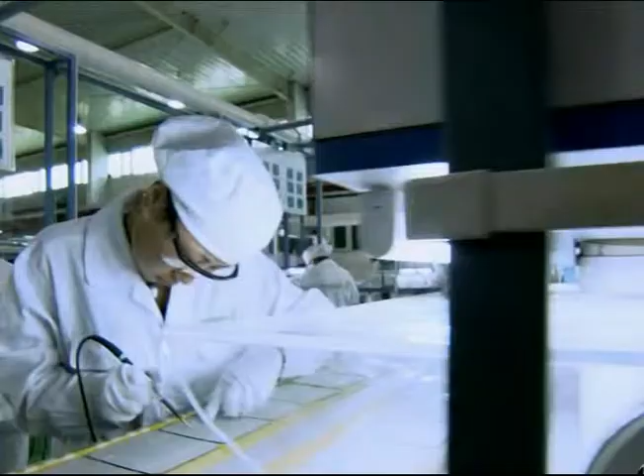Founded in Xi'an in 2002, with the company motto of Serving Customers, Emphasizing Quality, Nurturing Win-Win, Striving for Excellence, Enabling Innovation, Xi'an Tiangong Electric Limited Company has grown rapidly and steadily.

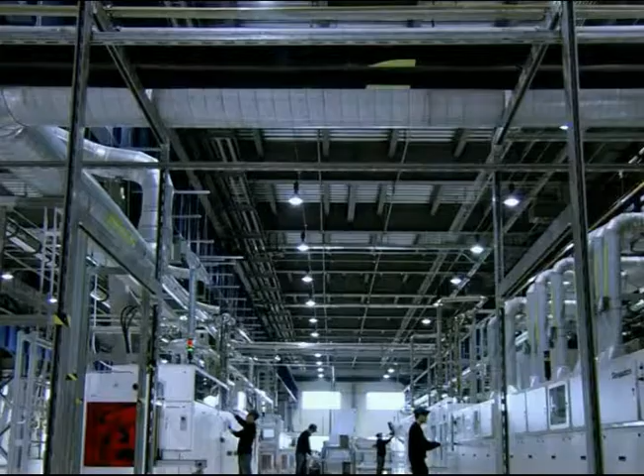TGE is now one of the premier varistor suppliers in China, with the most advanced technology, the highest product performance parameters, and the largest selection of product categories.

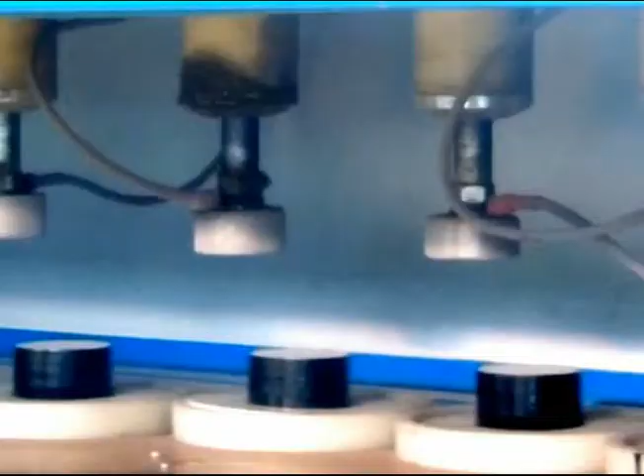TGE strives to support worldwide Western manufacturers with high performance and high quality products. Through tremendous growth in the last 10 years, TGE now possesses the manufacturing technology of various high-performance DC and AC varistors and high-gradient varistors.

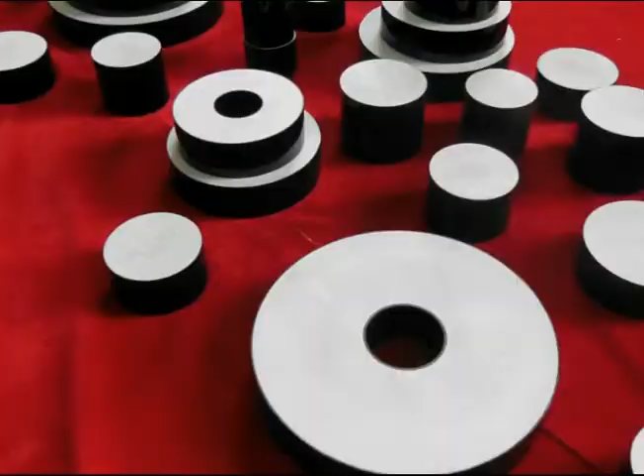TGE has built an advanced, complete varistor production line, complemented with a full range of diagnostic equipment and instruments. TGE has established an ISO 9001 compliant quality management system. TGE's management brings years of diverse experience in management and a history of success.

Combining business acumen with technical savvy, its executives lead a team of talented employees to provide strong varistor research and development and manufacturing capabilities. We truly appreciate the opportunity to earn your business and are looking forward to serving you.

Ladies and gentlemen, please allow me to give you a brief introduction of the process of production of the TGE varistor.

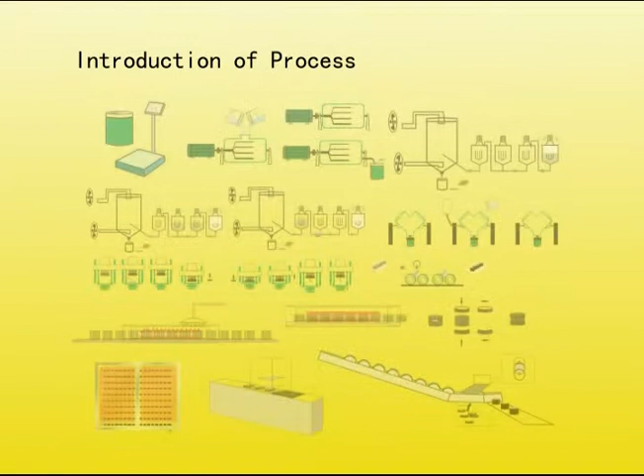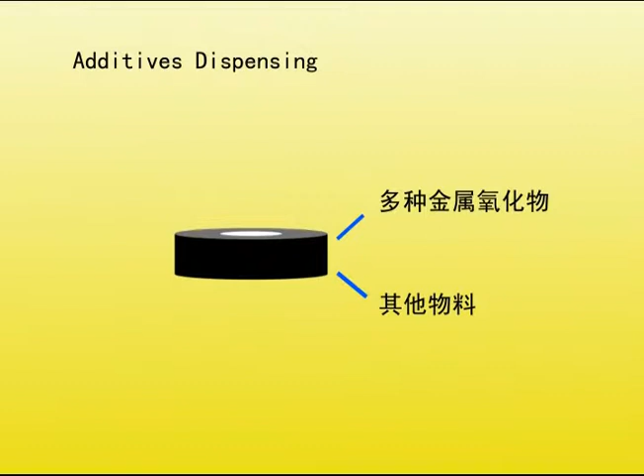The first step, additive dispensing. Material dispensing is a core part of varistor production. Material dispensing of zinc oxide, additives, and accessories is required in several processing steps. The most important one is additive dispensing.

Metal oxide materials are respectively measured per predefined weight on a high-precision electronic scale and placed in separate stainless steel containers for use in the next process.

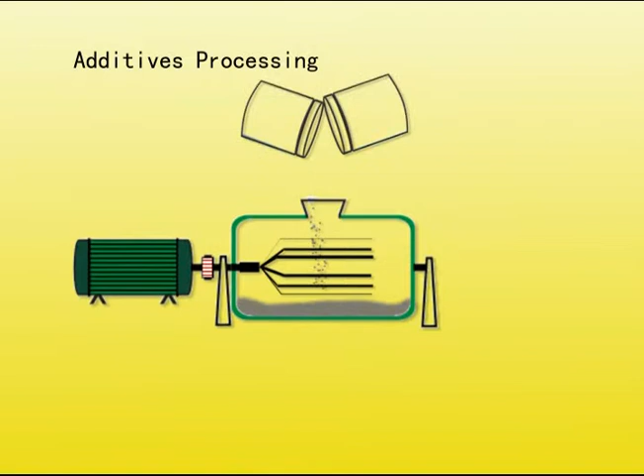The second step, additives processing. The additives dispensed per predefined ratio are put into the sand mill together with a certain amount of pure water for grinding. When the average diameter and the diameter distribution reach the requirement, the material is removed from the sand mill for use in the next process.

The third step, mixing and granulating. Zinc oxide powder, qualified processed additives and accessories, and pure water are measured per predefined ratio and put into a high-speed mixing tank for mixing and blending.

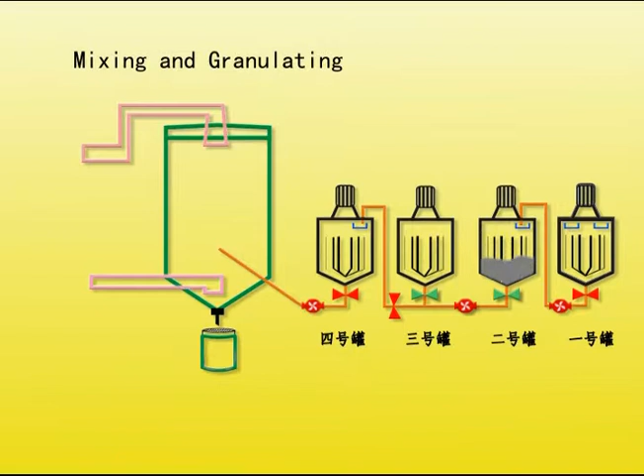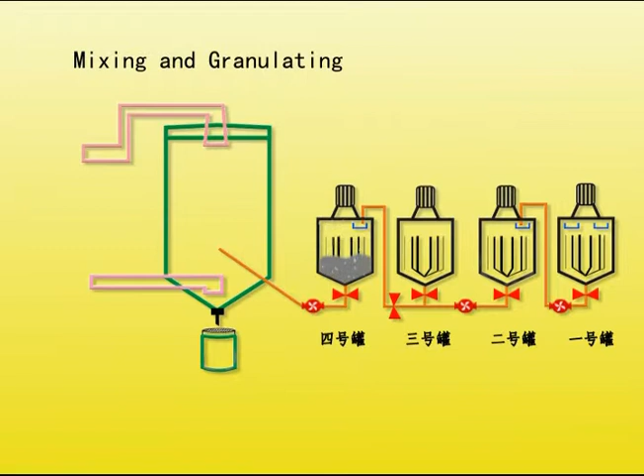Once the slurry reaches the required processing requirement, it will be put into a storage tank, and then a high-pressure spray gun is used to pour the material into the high-temperature spray drying tower to produce specified powder.

The fourth step, hydration of the granulated powder. A certain amount of granulated powder is poured into a hydrous machine. At the same time, pure water is slowly added in. The material is allowed to mix thoroughly to generate granulated powder with a stable and uniform hydrous rate.

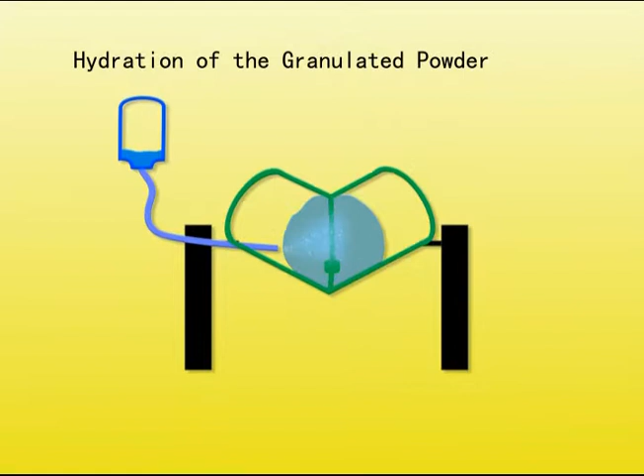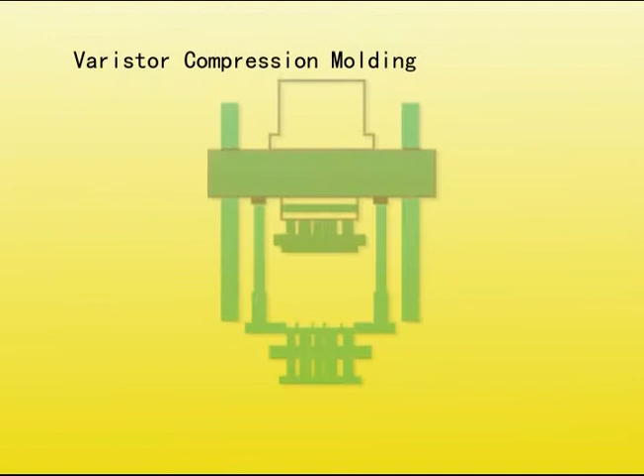The fifth step, varistor compression molding. An automatic varistor molding machine and different mold sizes are used to compress hydrous powder to produce a varistor body with specified size and density. The sixth step, varistor binder removal and pre-sintering.

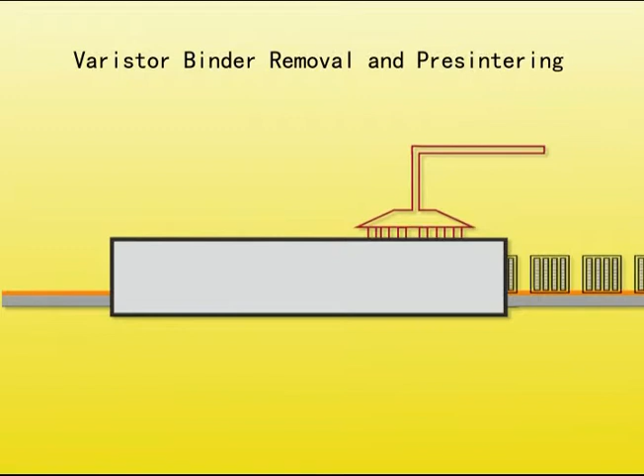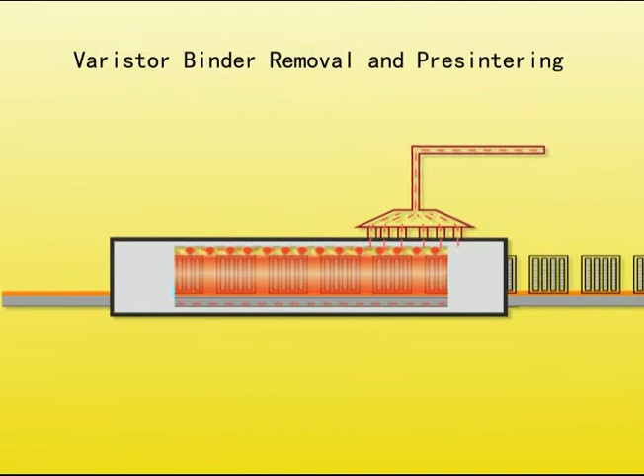The molded varistor is put into a sagger. The sagger is placed onto the rail of the automatic furnace and processed at a predefined speed to remove binder and water from the varistor until the shrinkage rate reaches the processing requirement.

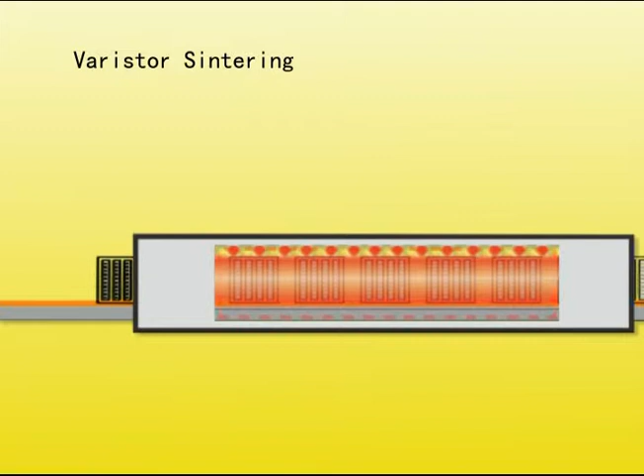The seventh step, varistor sintering. After the binder removal and pre-sintering process is completed, the varistor is put into a sagger. The sagger is placed onto the rail of the automatic furnace and processed strictly according to the predefined temperature and velocity to complete the sintering of the varistor.

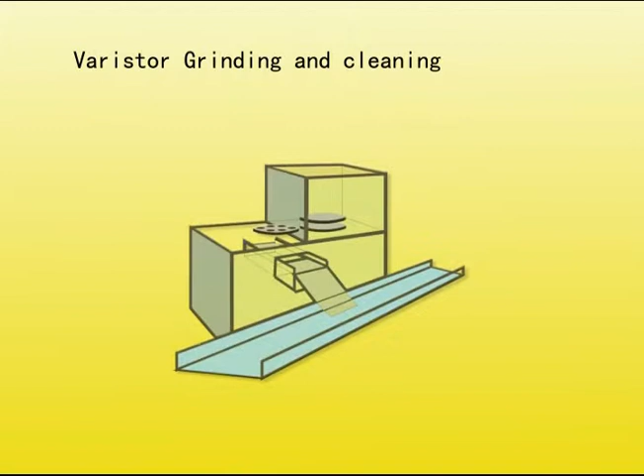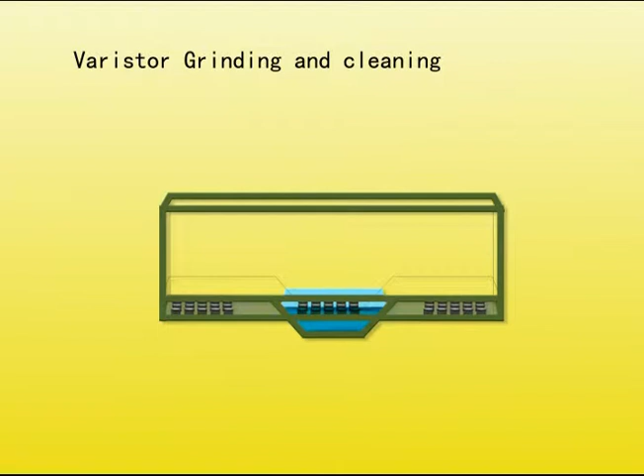The eighth step, varistor grinding and cleaning. The two surfaces of the sintered varistor are grinded using the grinding machine according to the predefined form and position tolerance specification. The grinded varistor is then placed into a tunnel ultrasonic cleaner for cleaning and drying.

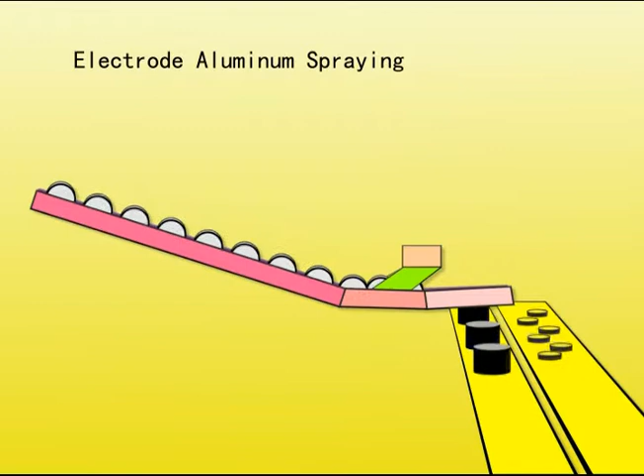The ninth step, electrode aluminum spraying. The varistor and the rubber wrap for aluminum spraying are put into an automatic carrying machine to place the rubber wrap at the two ends of the varistor. The varistor is then put into an automatic sprayer to apply aluminum coating on the electrodes at the two ends of the varistor respectively. The rubber wraps are then removed using the uncovering machine, and the varistor is then cleaned.

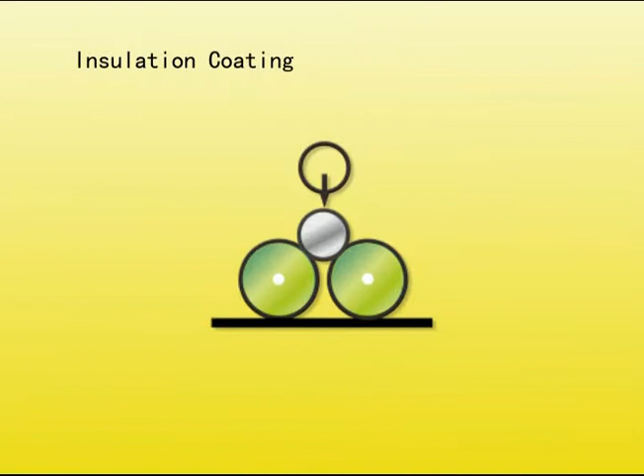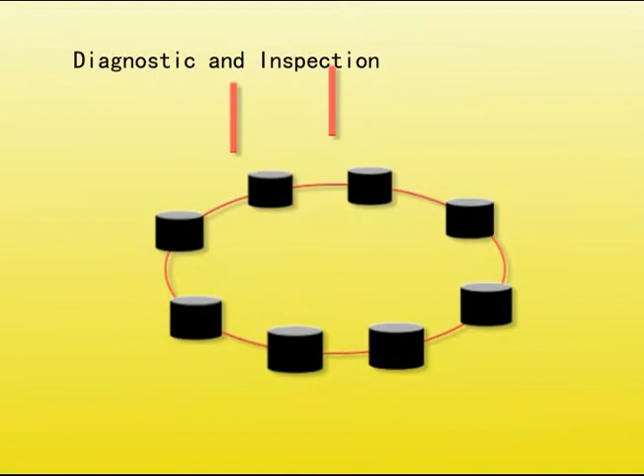The 11th step: diagnostic and inspection. Rectangular wave screen test, DC reference voltage test, impulse residual voltage test, and appearance inspection will be conducted on the processed Varistor. The diagnostic parameters are automatically coded on the surface of the Varistors which pass the inspection.

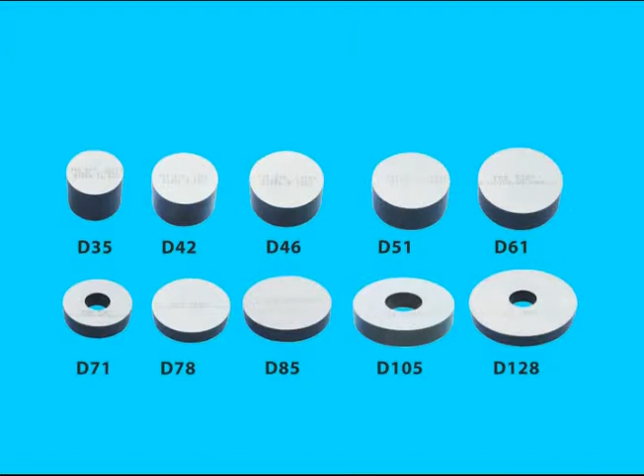With same reference voltage, the VA characteristics curve of the TGE Varistor is flatter than the Varistors from other manufacturers with the same specification. Therefore, the arrestor with TGE Varistor provides large current and better protection at the same reference voltage.

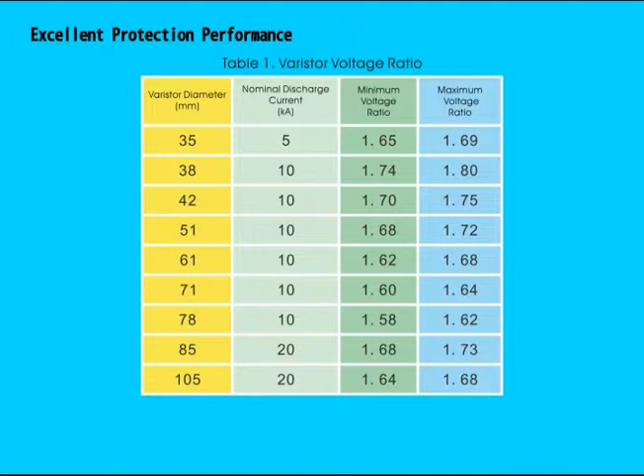Or with the same level of protection, the reference voltage and the continuous operating voltage of the arrestor can be higher. Therefore, the arrestor will be subject to a lower electric stress, highly desirable for the safe operation of the arrestor.

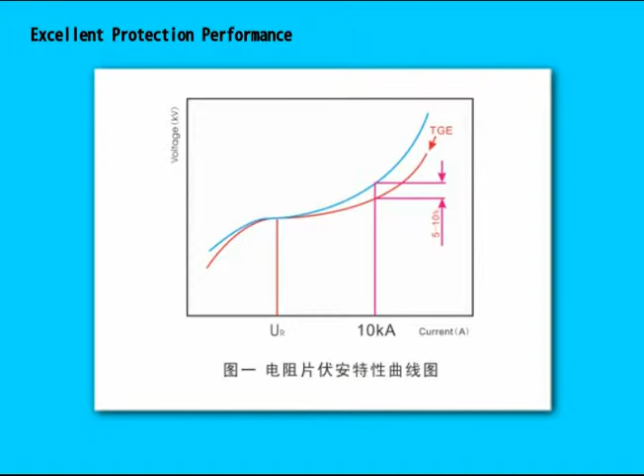The maximum energy absorption capability of a single pulse is 270 joule per cubic centimeter. Therefore, for the arrestor assembled with the varistor under same specification, using TGE product will provide higher energy absorption capability. Or under same energy absorption capability requirement, TGE varistor with smaller specification can be selected. This provides the customers the opportunity to reduce the visual dimension of the varistor and therefore lower the manufacturing cost.

In applications such as capacitor group protection, series compensation device, and composite arrestor, the effects of cost reduction from smaller size can be more evident.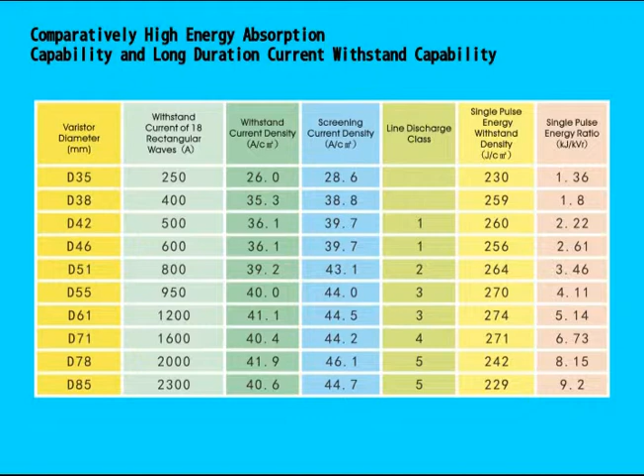Excellent high current withstand capability. Monotonically decreasing aging characteristics. This figure illustrates the artificial accelerated aging test characteristics of the AC high gradient varistor.

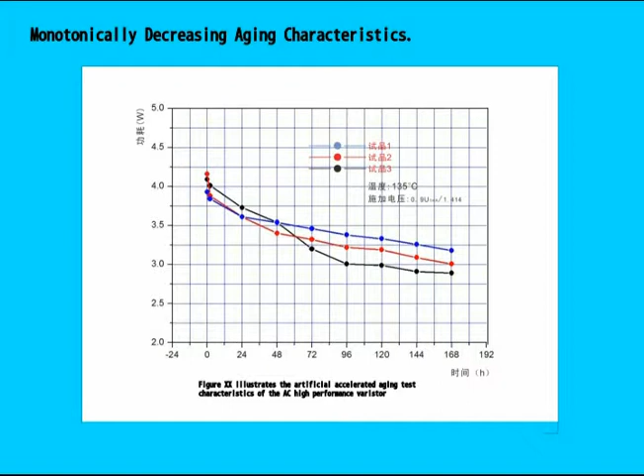This figure illustrates the artificial accelerated aging test characteristic under DC voltage of the DC high-performance varistor.

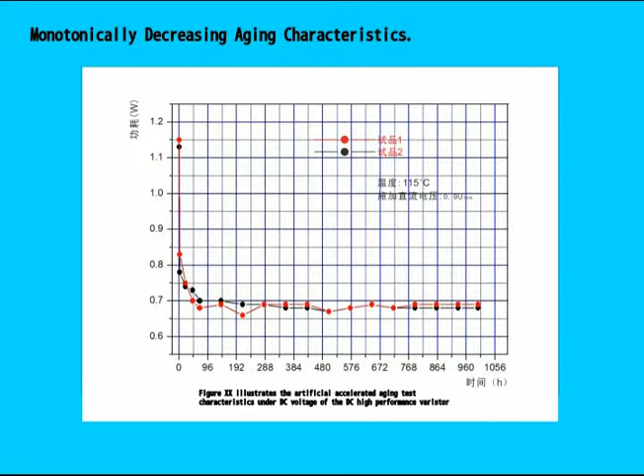This figure illustrates the artificial accelerated aging test characteristic under AC voltage of the AC high gradient varistor. The above three aging curves demonstrated that the TGE varistors have excellent aging performance.

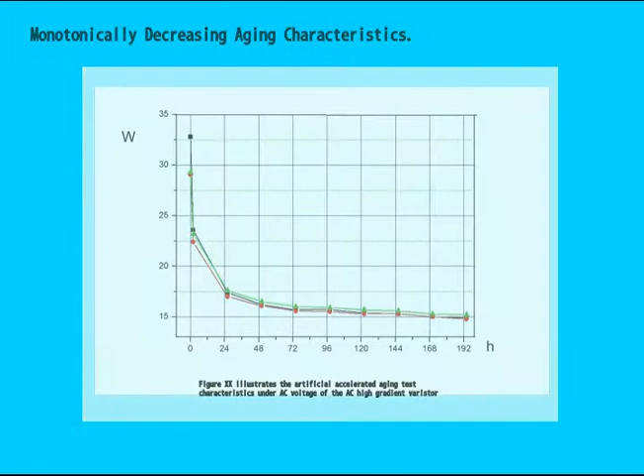Extremely high operational stability. As shown in the table, after sustained high current impulse at specified amplitude or rectangular impulse, the change rate of both the residual voltage and the reference voltage of the TGE varistor are small. This can ensure the overall operational status of the varistor remains basically unchanged after the arrestor action.

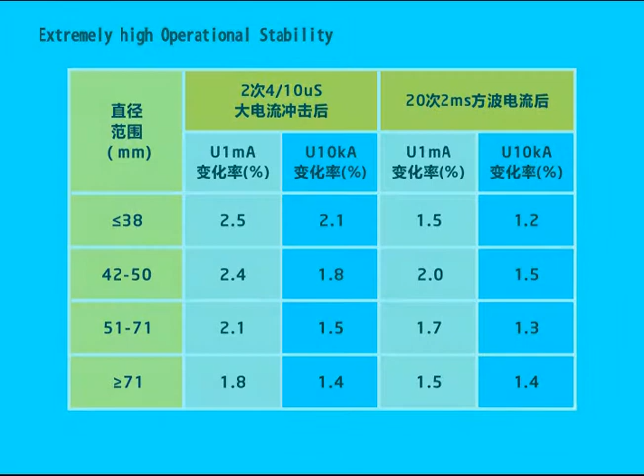Multiple insulation coating selection available to the customers.

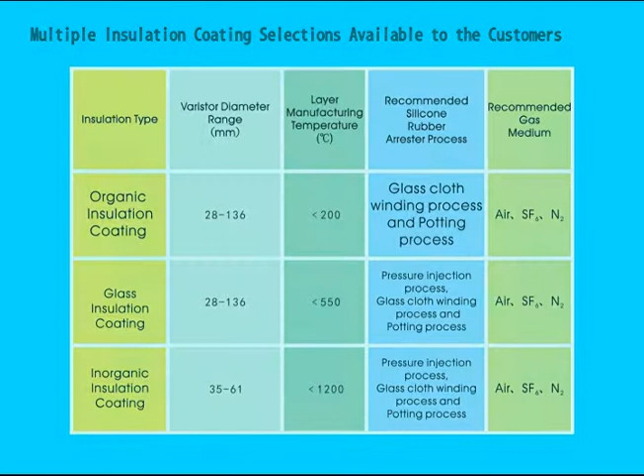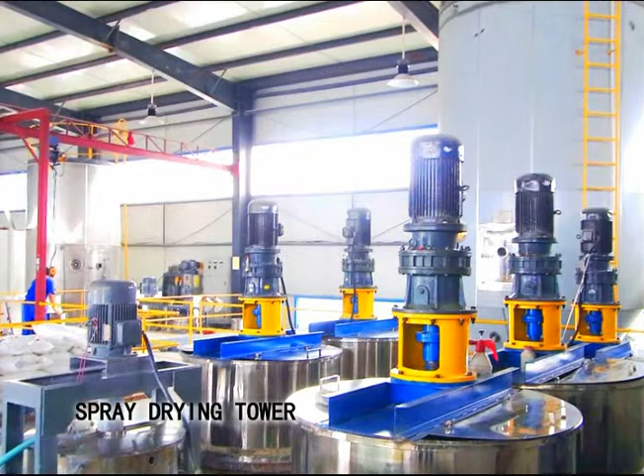Automatic aluminum spray guarantees the appearance and quality of the aluminum electrode surfaces and improves the operator's working environment. 2 milliseconds rectangular wave current impulse withstand test.

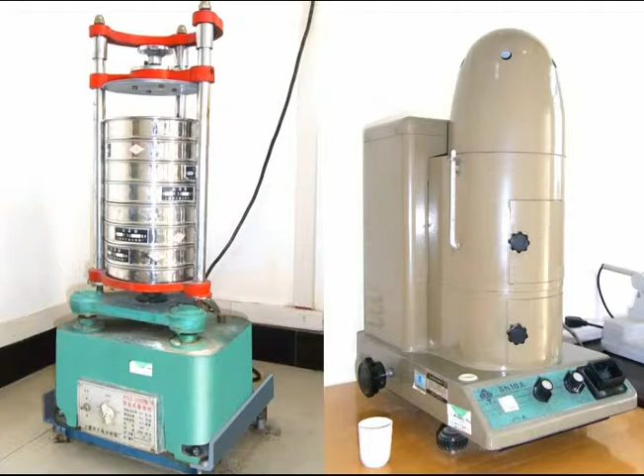2 sets of 2 milliseconds rectangular current impulse withstand test equipment can guarantee the screening of each finished varistor and conduct rectangular wave capacity spot check tests on the varistor. The amplitude of the impulse current can be as high as 3000 ampere.

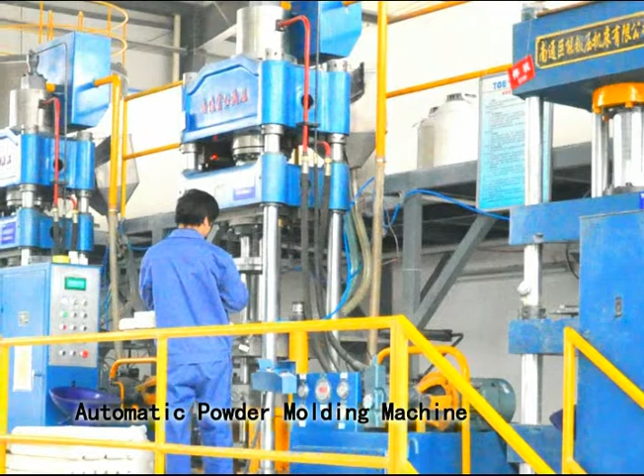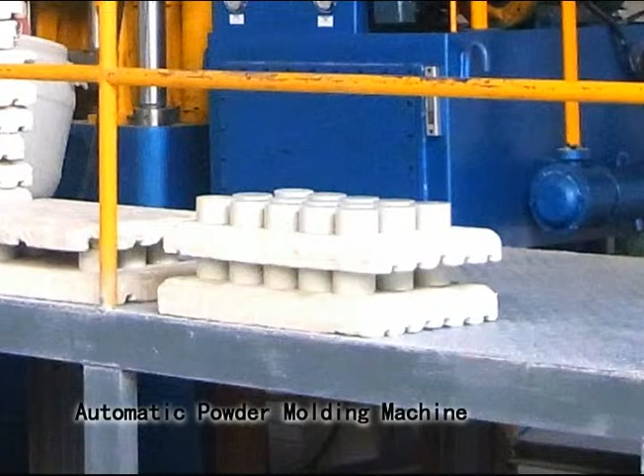High current and lightning current impulse test equipment is used to conduct current impulse withstand test as well as lightning and operation impulse residual voltage test.

Aging test equipment. Zinc oxide Varistors aging test equipment can conduct AC and DC aging tests on the finished Varistors.

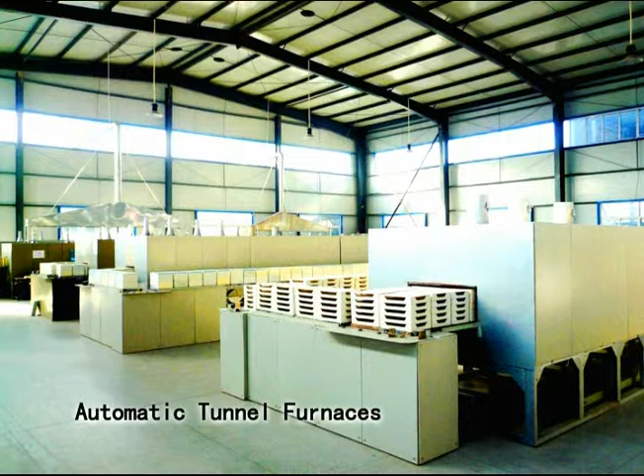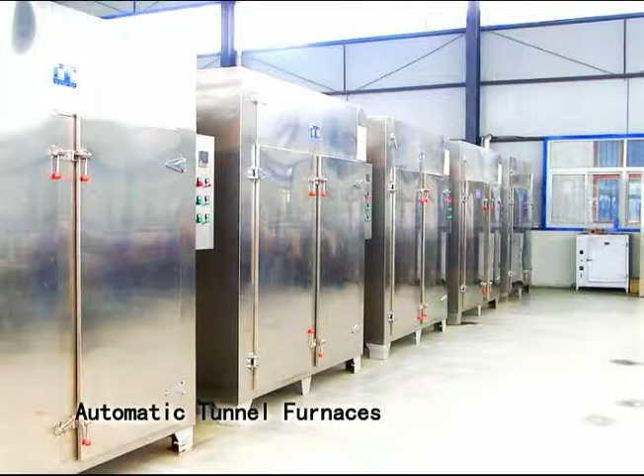Automatic DC parameter diagnostic and coding equipment. It can simultaneously measure the DC parameters and perform coding on 5 varistors in a circle automatically, resolving the issue of low efficiency, high error, and high labor intensive sorting in manual measurement operations.

As a result, the production efficiency is improved.

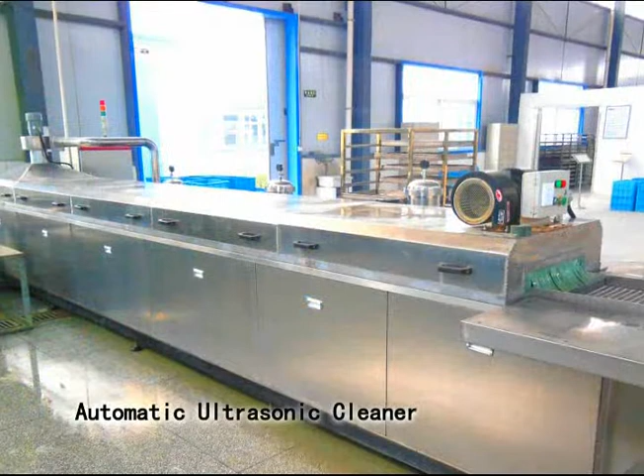Spray drying tower. TGE has 2 large-scale spray drying towers and associated mixing apparatus capable of daily output of 8 tons of zinc oxide granulated powder. Advanced laser particle analyzer, moisture analyzer, and a vibrating screener are used to rigorously monitor and control the processing and quality of the granulated powder, a key processing step in zinc oxide Varistor production.

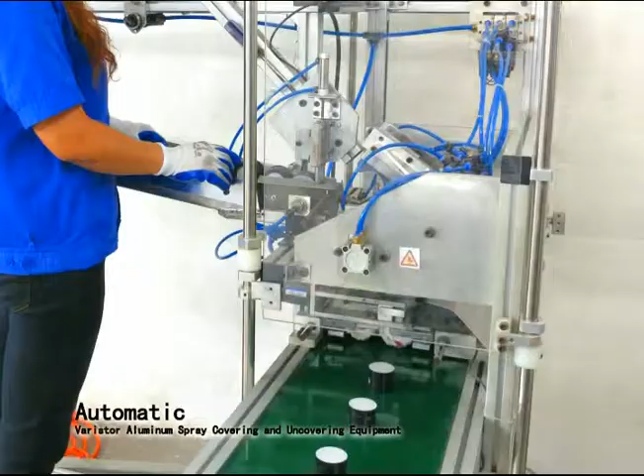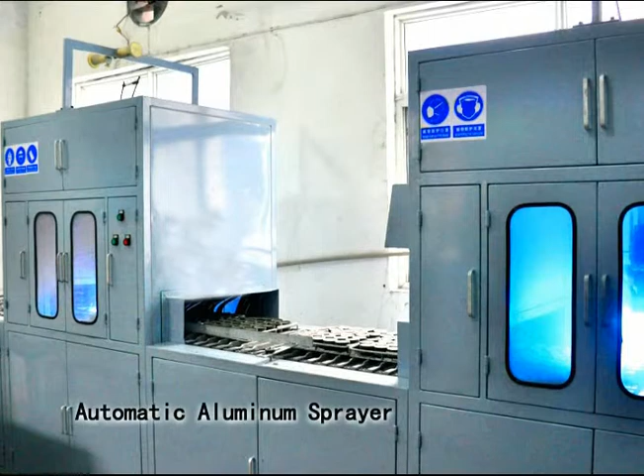Automatic powder molding machine. 5 automatic Varistor body molding machines with new design specifically oriented towards the Varistor industry. More than 30 high-precision forming molds capable of molding different Varistor products with diameter ranging 30 mm to 136 mm, covering a full range of Varistor products in the high-voltage transmission and distribution systems.

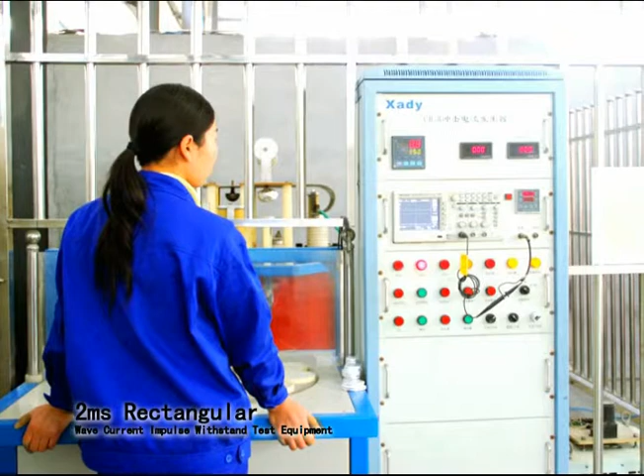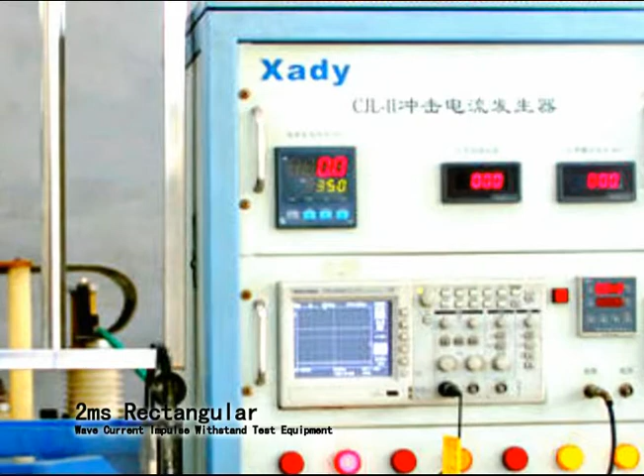Automatic tunnel furnaces: 7 automatic multi-push board tunnel pre-sintering and sintering furnaces. The advanced design and high-precision control system adopted in these furnaces enable the production of high-performance and high-quality Varistor products with reduced energy consumption.

Horizontal and vertical grinding machine. For products with different diameters, TGE employs large-scale horizontal and vertical grinding machines to conduct precision surface grinding of the sintered Varistor.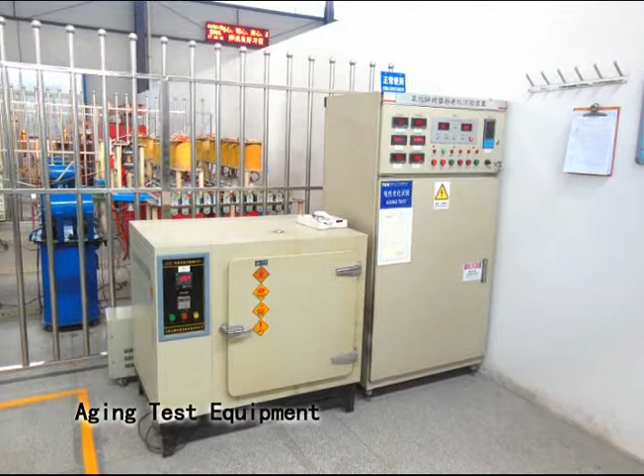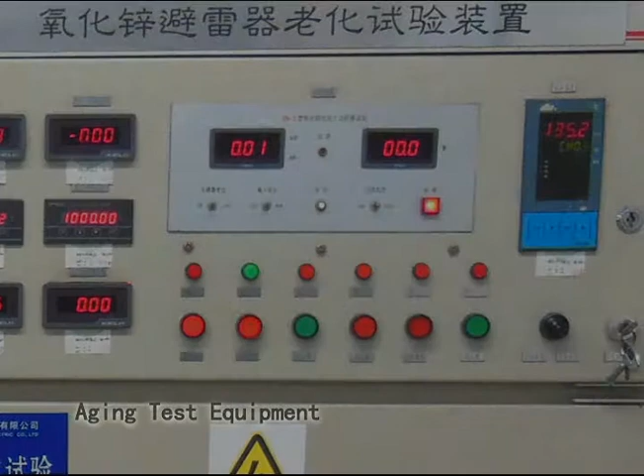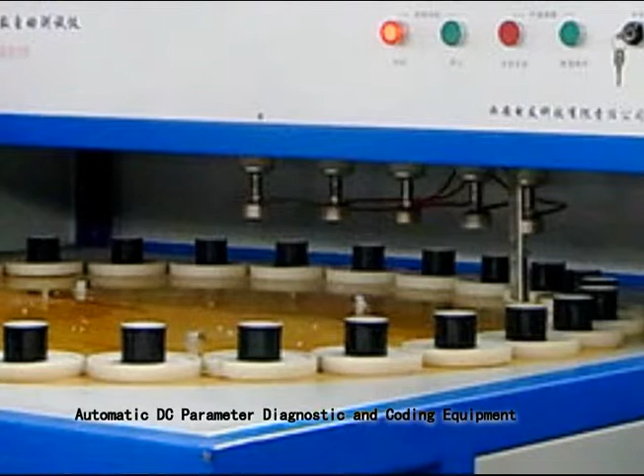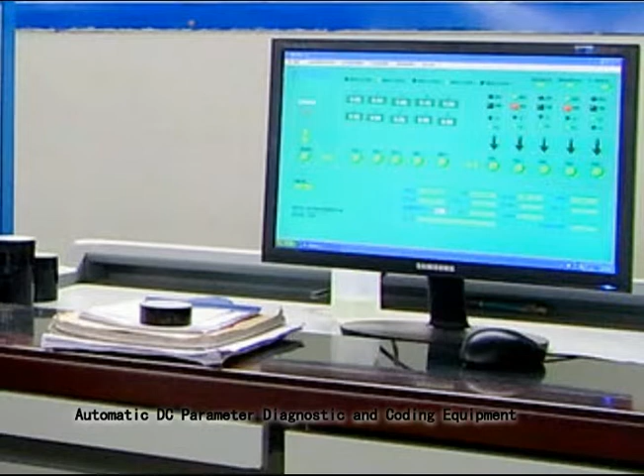One of the key reasons that TGE Varistors possess high performance and high quality is that all factors of the manufacturing process are under thorough and precise control. In addition to ensuring the proper operation status of the manufacturing equipment, the quality control also involves the following aspects: rigorous acceptance control of all raw materials.

optimized control performance. Rigorous in-process inspection and final product inspection: the detailed and precise in-process monitoring and inspection can ensure that defective semi-finished products do not slip into the next processing step, and that disqualified products do not slip into the market.

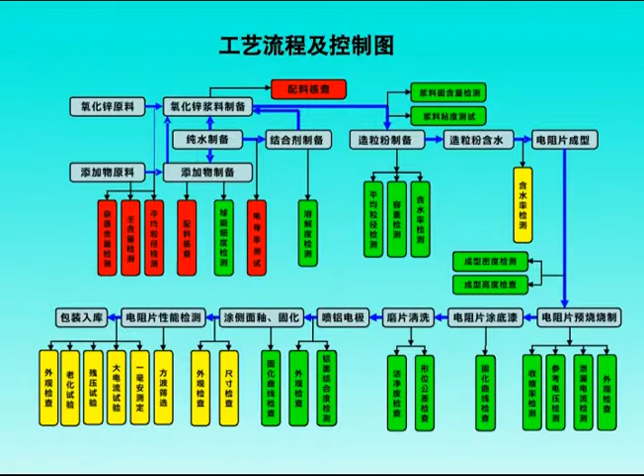750 kV and 1000 kV ultra-high voltage arrestors and DC 800 kV arrestors. All the arrestors have been operating normally.

In recent years, in addition to the continued expansion in the high-end market in China, TGE products started to penetrate the international market through excellent product performance and quality and strong cost advantage. In 2011,

MacLean Power Systems, one of the top 3 arrestor manufacturers in the USA, conducted a thorough evaluation of TGE, including the manufacturing process, product performance, and quality control, and so on, and selected TGE as its main Varistor supplier.

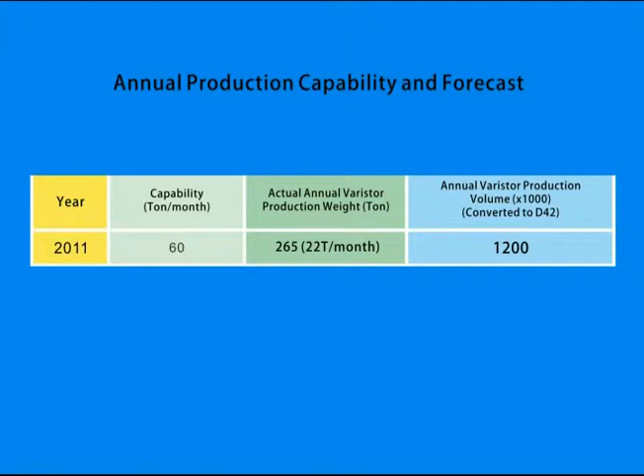In 2011, the monthly production capability of TGE was 60 tons per month. Actual annual production was 265 tons. In 2012, the monthly production capability of TGE is

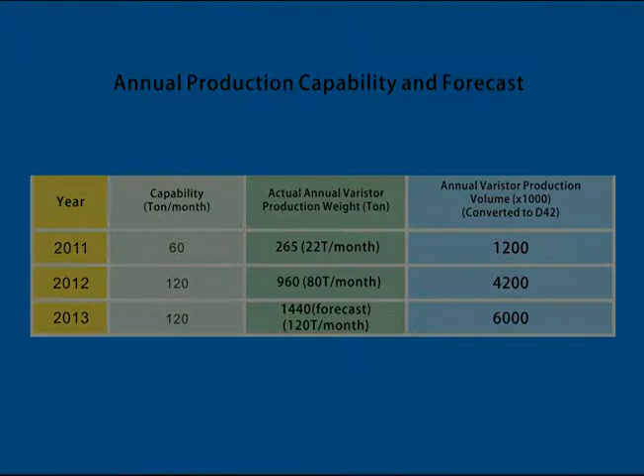120 tons per month. From January to August, the output of these 8 months is 640 tons. The monthly average output is 80 tons. The forecasted annual production in 2013 will be 1,440 tons.